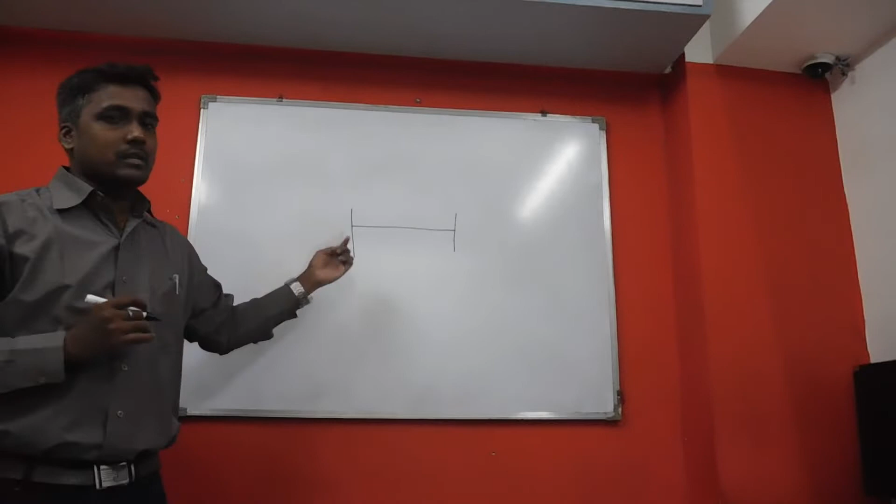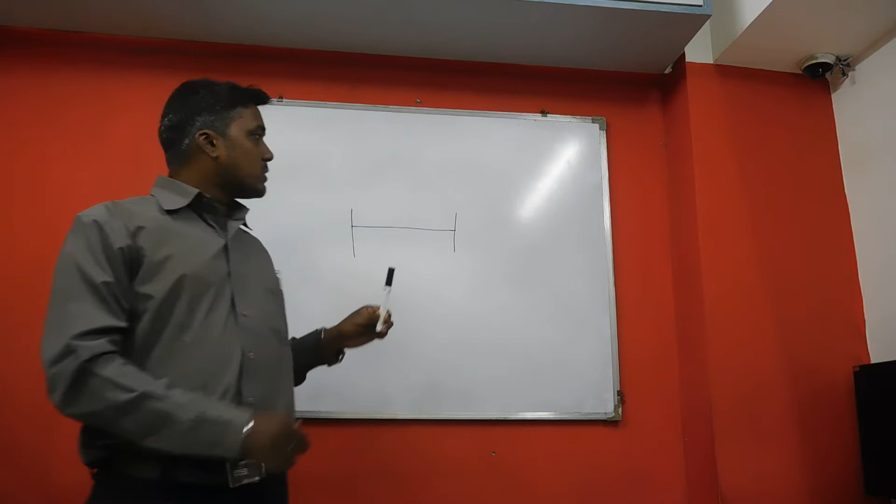When we were in school as well as in college, we did an experiment: there were two poles, and between these two poles a string was tied. Now what we used to do is take a tuning fork, strike it on a pad, and then touch it to the pole.

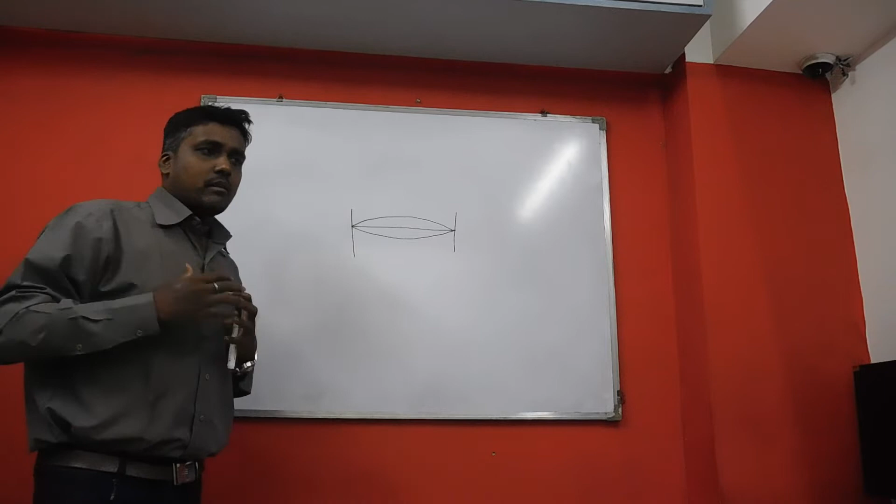Once we touch the fork to the pole, the string starts vibrating, and initially the shape of the string would look like a single loop. If we performed this experiment in groups, one student decided to strike the tuning fork with extra force, a harder way.

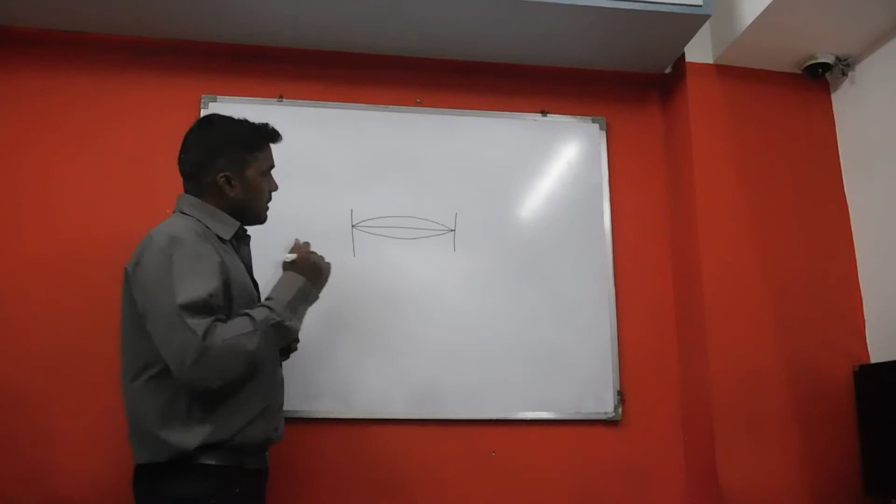Then he struck it again with so much energy, and again touched the fork to the pole. Now the string was vibrating differently. Initially there was only one loop, but now there are two loops. So once we gradually increase the frequency of the tuning fork, there will be more loops.

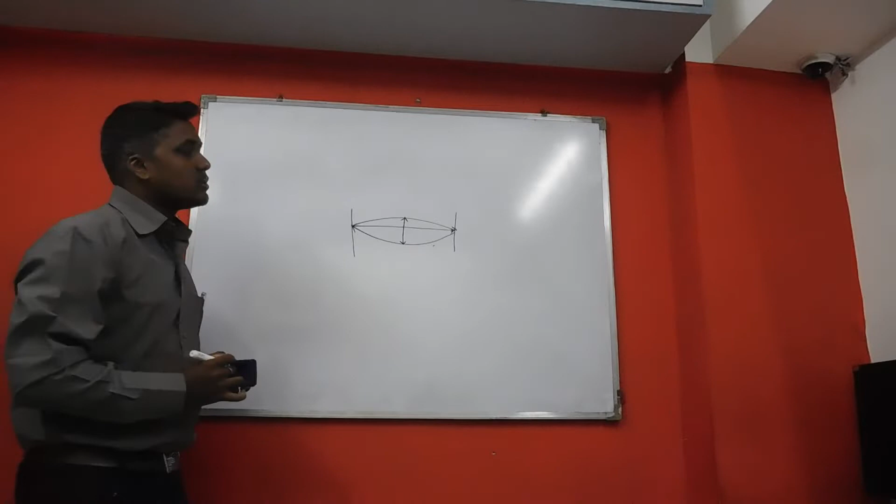Now what happened when the first loop occurred? This was the loop, and this distance will be maximum at the center. So how many displacements will there be? Only one displacement, the maximum displacement. That's why it is called the first mode.

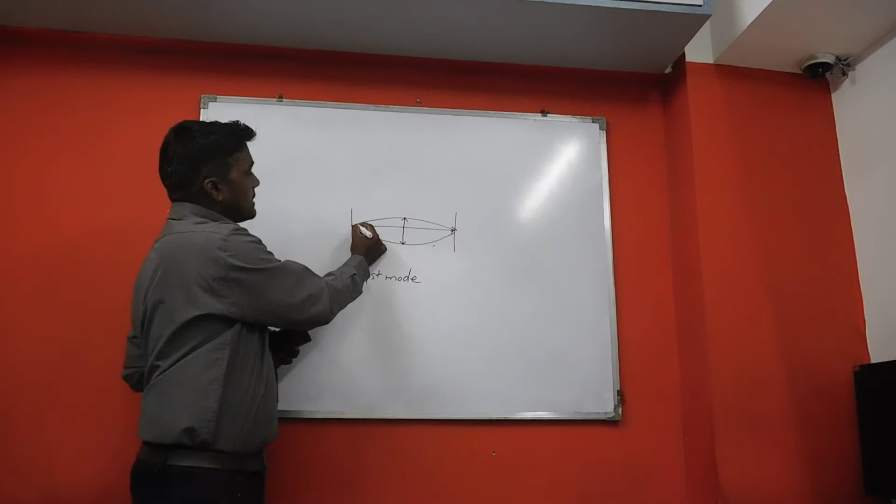Then if we gradually increase the frequency, there will be two maximum displacements. One will occur at the 1/4 portion, and the second will occur at the 3/4 portion. This is called the second mode.

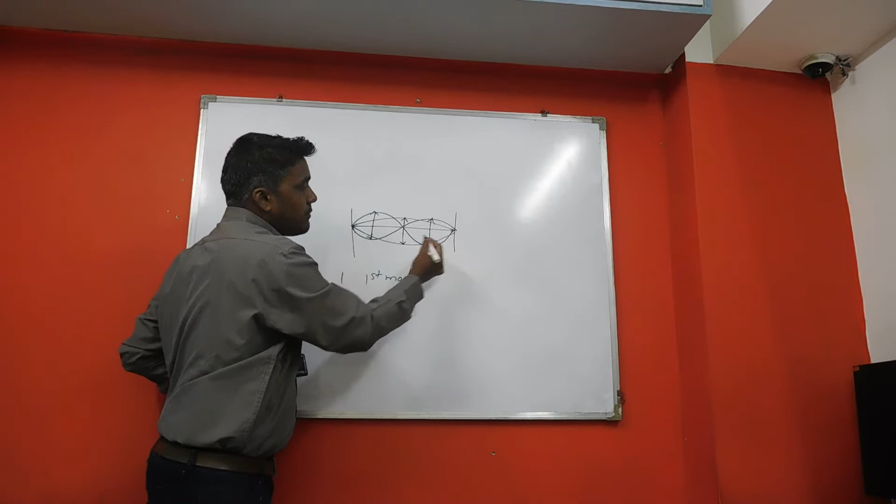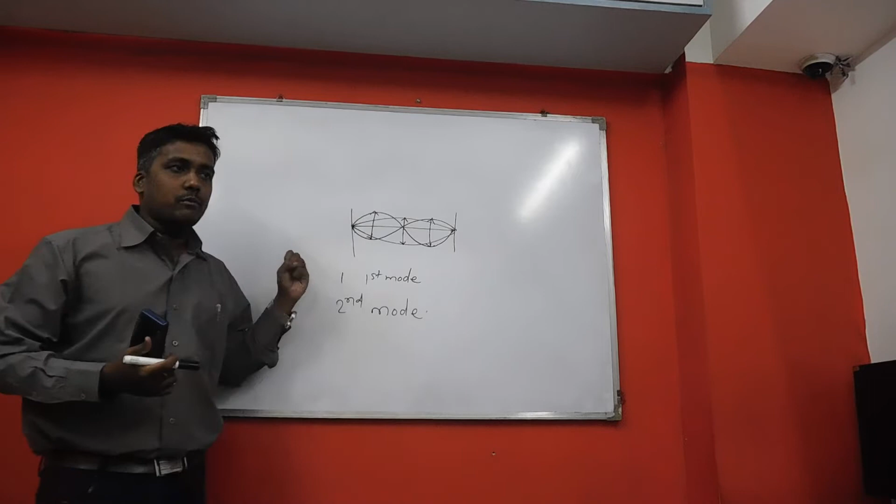Now in modal analysis, we used to find out the different modes, and we used to find out what is the behavior of that object at that particular mode.

So let's go to the software. Let's talk about how to perform the modal analysis in the software. We have opened the Workbench, version 19.2, and in that we are going to perform the modal analysis.

Now to perform the modal analysis, we have an analysis system called Modal. So just drag and drop this modal system into the project schematic.

We'll consider a simple example. First we have to create a geometry. So simply right click on this geometry and go to the Design Modeler.

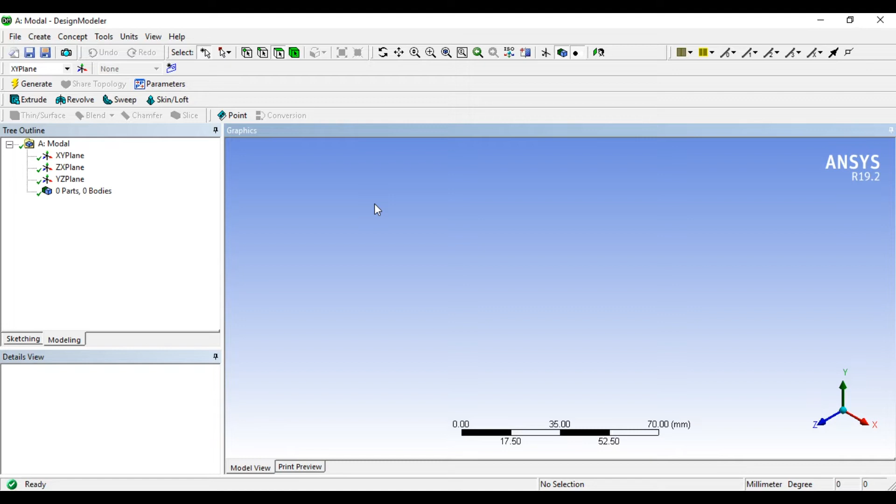Let's set the units to millimeter, so go to units and click on millimeter. Now for this modal analysis, we will consider a simple example of a cantilever beam, where one end of the bar will be fixed and the other end will be free, as we have to calculate the natural frequency of the bar.

Let's go for the modeling. Simply right click on the XY plane and say Look At. Now to create a bar, we will create a simple rectangle and then extrude it. So simply draw a rectangle.

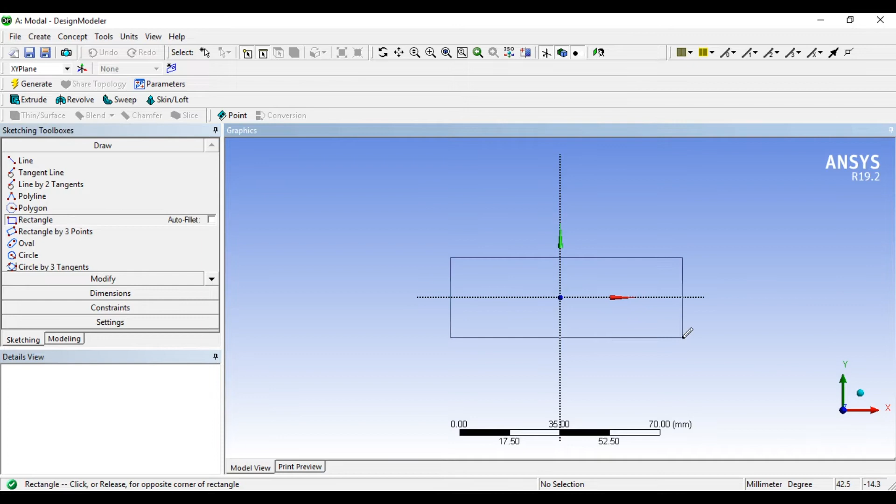Now we'll go to the constraint. Right now all the lines are horizontal and vertical, so no need to do it again. We will put a symmetry constraint: click on symmetry, select the axis, then select the sides. Then again perform the symmetry option by right-clicking and selecting a new symmetry axis, selecting the horizontal axis, the first side, and then the second side. The symmetry has been done.

Now we will give the dimensions. I will consider the dimensions as 50 and 10. Now we will extrude it: simply click on extrude, select Sketch 1, and say Apply.

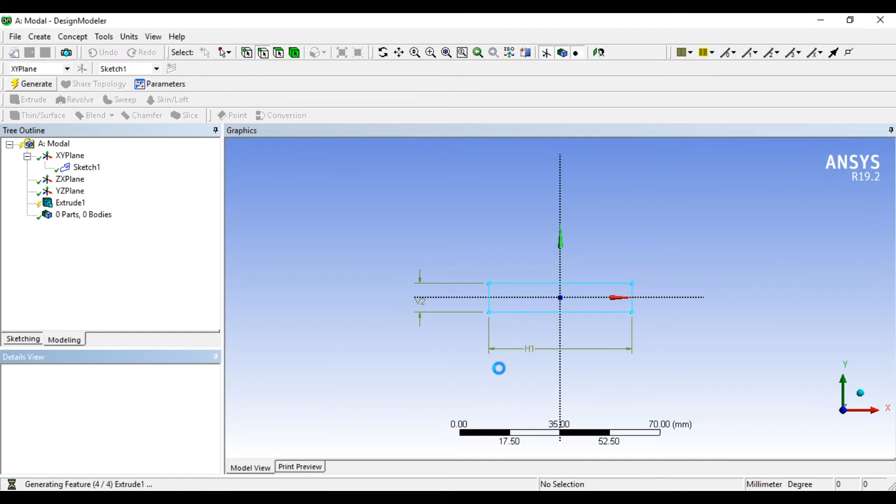Then in the distance we will put the value as 250, and say Generate. Now it has created a simply supported beam, or I can say a cantilever beam.

Now let's perform the modal analysis on that. To perform the modal analysis, we have to go for the Model, which we are calling the Mechanical.

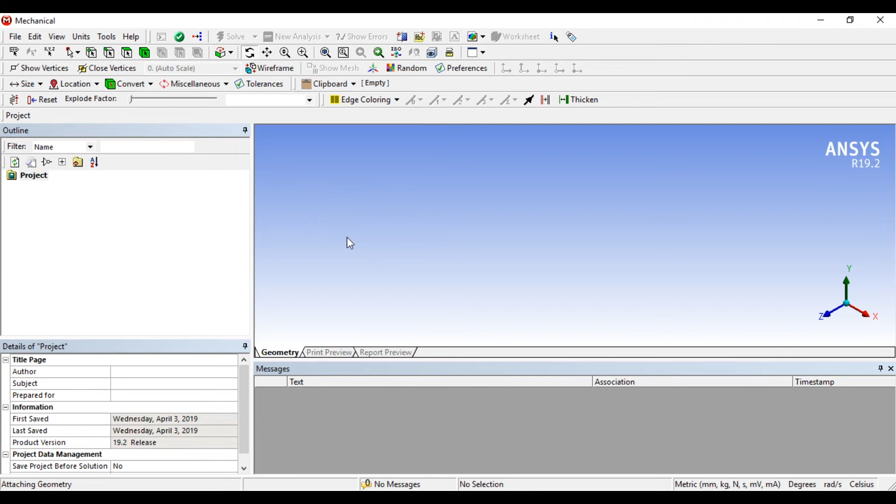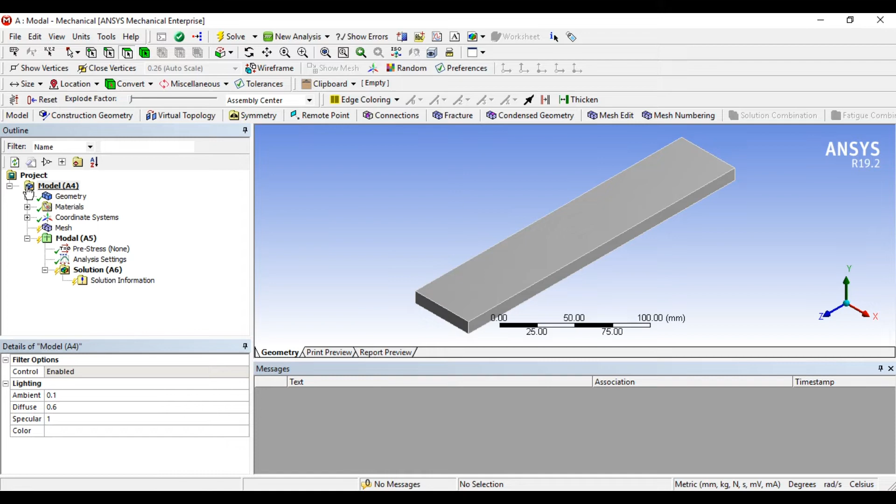Okay, now this is nothing but the mechanical model. All the steps, including meshing, the boundary conditions, the setup part, the solution and the results, we will perform in this model itself. So let's start with the material. Right now no need to change any material, we will use structural steel as the default material.

Now what is the next step? We have to go for the meshing. So right now I am doing the meshing with the default values. Simply right click on the mesh and say generate. Okay, the mesh has been created. This object has been divided into a number of subdomains. That process we are calling meshing, or in theoretical language, discretization.

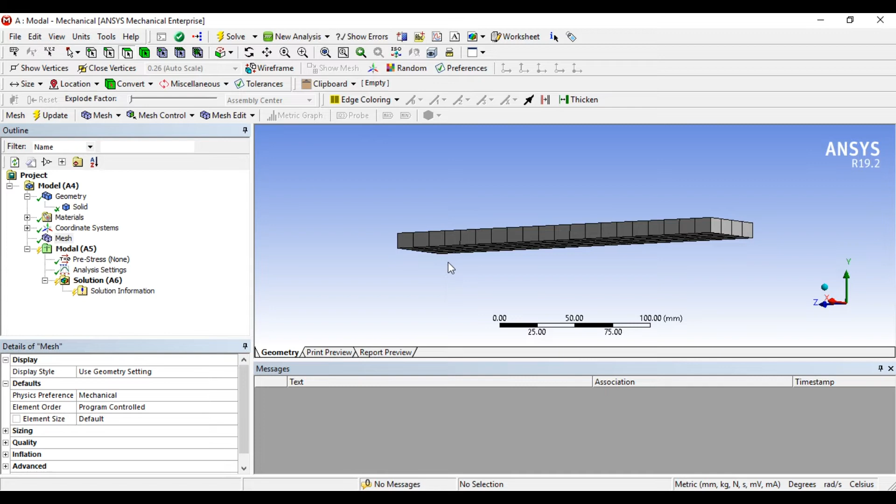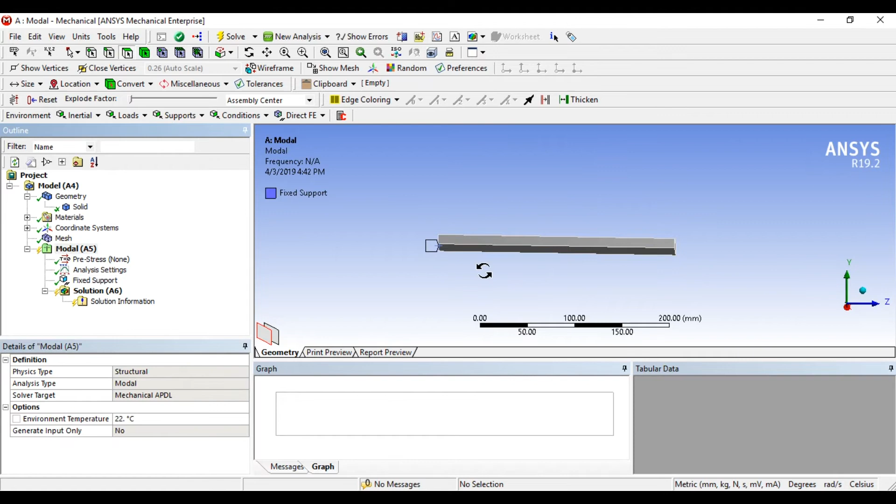Now what is the next step? We have to apply the boundary condition on it. The boundary conditions for this object are: one end of the bar is fixed and the other end of the bar is free. So what we will do is apply a fixed support on one of the faces. Simply click on the model, go to supports, fixed support, select the face and then say apply. Okay, the support has been set up. Only fixed support will be there and the other end will be free.

Now we will try to find out how many maximum modes you want to find out. Just go to the analysis setting and in that you can find the option called maximum modes to find, where we can set the maximum number of modes and the behavior of the object for the particular mode. I will consider 6 number of modes for that. Okay, the setup part has been completed, the boundary condition has been applied.

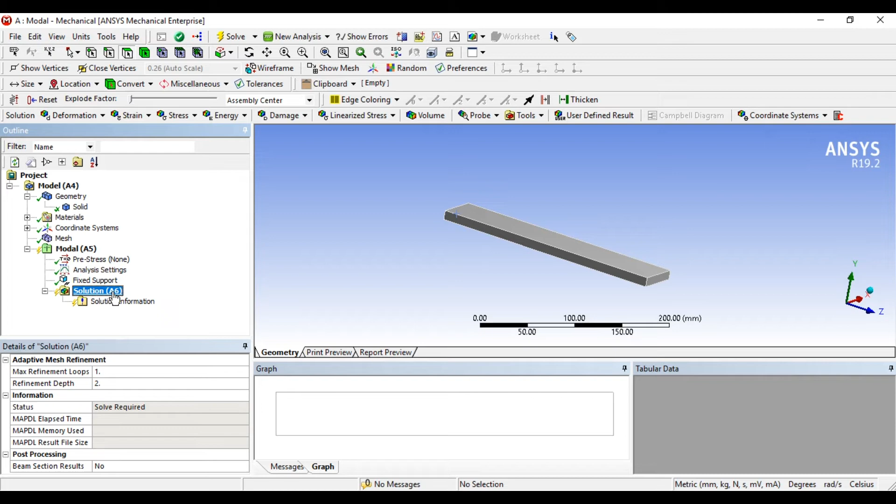Now we'll go to the solution. So like in structural analysis we have to consider stress and deformation, but in this case we don't need to consider any stress or output there. Simply right click on this and say solve. Now ANSYS is solving this solution. The solution part is completely automatic, no need to do anything for that.

Okay, the solution has been done. Now if you observe the graph over there, you will find the 6 modes: 1, 2, 3, 4, 5, 6. Besides that we can see a tabular data showing some values. The table contains the modes and whatever frequency we have got, included in that table. So we'll try to understand what is given in the table.

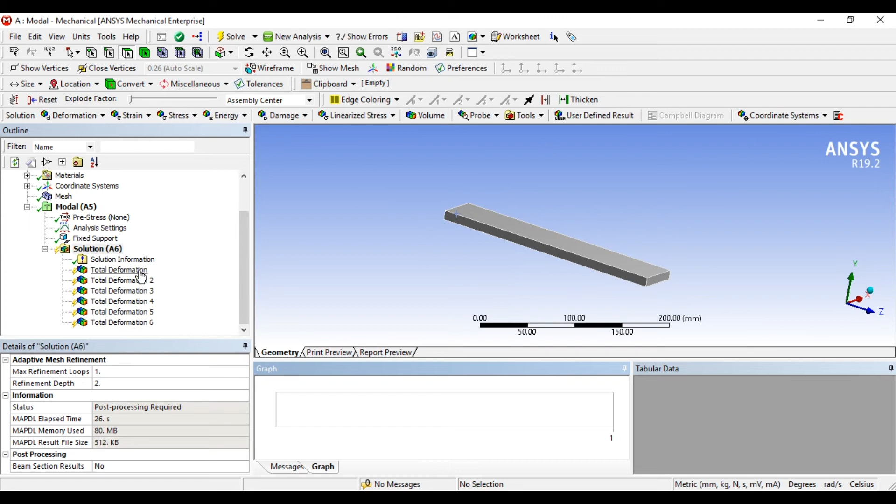Now let's check out what happened in the first mode. So what is the displacement we are getting now, we have to find out. Simply right click on this graph, say select all, again right click and say create mode shape results. So it will create 6 modes there, so 6 deformations are there. Okay, so simply we will click on solve.

Okay, so what happened? We have the first mode and for that the first deformation is there. Now what is the frequency value? It is 132.24, and at that moment we are getting a maximum displacement of 64 mm. So what is the meaning of that? How do we interpret this result? When the excitation frequency reaches 132.24 Hertz, at that time the displacement will be 64.045, and the behavior will be like this.

So we will see the animation over there. So it will look like this. This is the behavior of the object for the first mode. Similarly, we can observe the behavior for the second, for the third, fourth, fifth, and the sixth one.

So if you observe all the modes, we will see at mode number 4, when the excitation frequency is 1211.8, the deformation is maximum. So what is the meaning of that? The natural frequency of the object is nothing but 1211.8. Why? Because at that point the deformation is maximum and after that the deformation is decreasing. See, 64 and then 62.

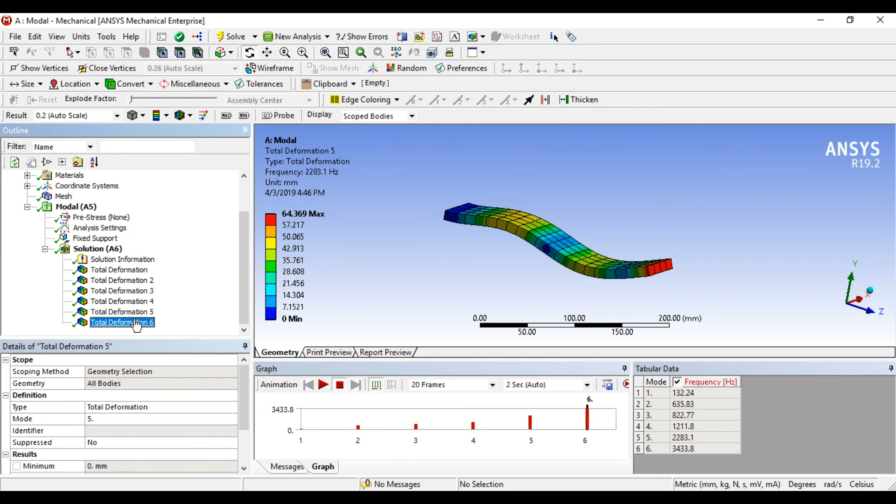Now as a design engineer, our task is to extend, reduce or increase this first mode frequency up to that natural frequency value. That means we have to change the design in such a way that the first mode will occur after 1211.8 Hertz. This is nothing but the modal analysis, and this is all about how to perform the modal analysis as well as how to predict the result in the modal analysis. Thank you so much.